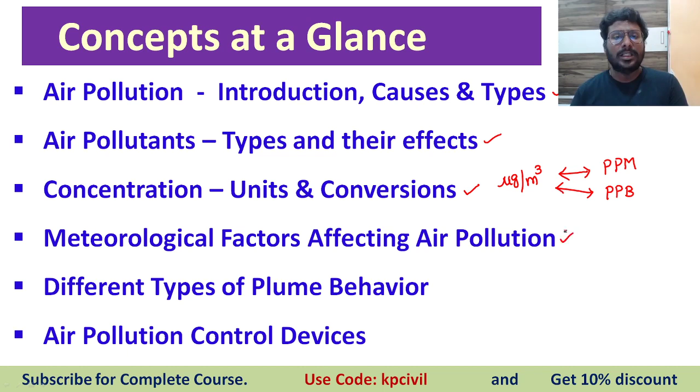We have discussed already, and we have gone through just an introduction of meteorological factors yesterday. Today we are going in depth related to meteorological factors - what are meteorological factors, what are their effects, and all those things. Just in brief, within 5 minutes I am going to tell what we discussed yesterday.

Yesterday we discussed regarding effect of temperature on air pollution, studied with respect to lapse rate. Lapse rate is change in temperature with respect to altitude, dt by dz. What we can write down: T2 minus T1 by Z2 minus Z1. Temperature at an altitude Z2 is T2. Temperature near to ground level at an altitude Z1 is T1. Difference in temperature to difference in altitude - that is said to be lapse rate.

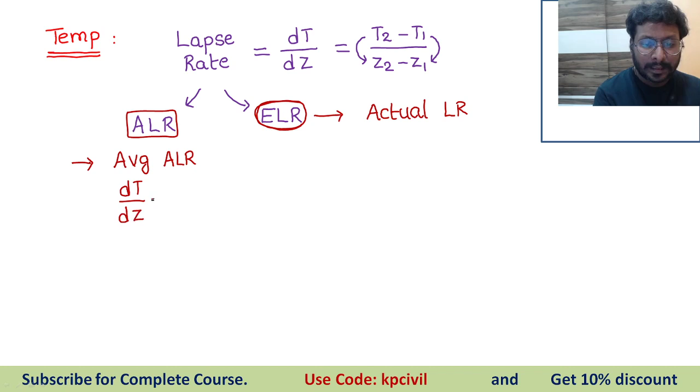This lapse rate we have differentiated into 2 types: adiabatic lapse rate and environmental lapse rate. Theoretical, standard or reference lapse rate - that we conclude as adiabatic lapse rate. Practically varying, actually what is going to happen in the atmosphere, time to time, place to place, region to region, as per atmospheric condition - that is environmental lapse rate. This adiabatic lapse rate, we have given average adiabatic lapse rate in the entire atmosphere, where dt by dz equals a decline of 6.5 degrees Celsius per 1 kilometer - that is average adiabatic lapse rate.

Wet adiabatic lapse rate, where dt by dz is equal to a decline of temperature of 4 degrees Celsius per kilometer. The most comparable and most important for our exam point of view, dry adiabatic lapse rate, where dt by dz is equal to a decline of minus 10 degrees Celsius per kilometer. Actually that is 9.8, we have rounded it off to 10 - minus 10 degrees Celsius, minus 9.8 degrees Celsius per kilometer. That is said to be dry adiabatic lapse rate.

Now today, the continuation of the topic we are discussing - types of ELR. ELR is environmental lapse rate.

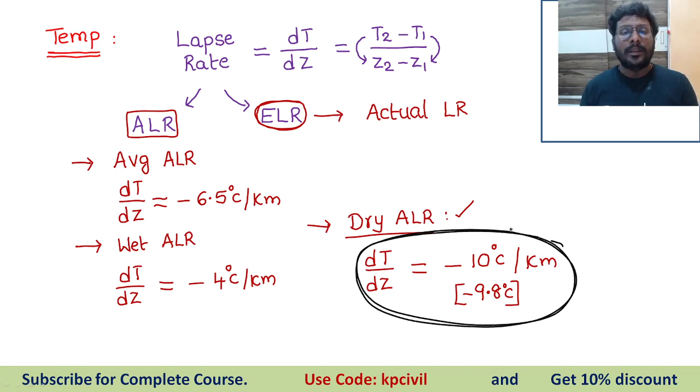We are discussing types of environmental lapse rate. Why have we given it the name super adiabatic? Because in comparison with the standard dry adiabatic lapse rate, we are expressing environmental lapse rate. So it is called a super adiabatic lapse rate, where we can say environmental lapse rate is greater than dry adiabatic lapse rate.

That means practically occurred change in the atmosphere. What is practically occurred change in the atmosphere? dt by dz. We have measured temperature at ground level and temperature at 1 kilometer, and the obtained value of dt by dz is greater than dry adiabatic. What is the value of dry adiabatic? A decline greater than 10 degrees Celsius per 1 kilometer.

Very important thing I am going to reveal here. Normally if you say mathematically greater than minus 10, what will you say? Greater than minus 10 is minus 9, minus 8, minus 7. No, here don't apply that mathematical condition. Here minus is the word representing decline, we are writing minus to represent decline. So dt by dz greater than minus 10 means decline of more than 10 degrees Celsius takes place. So temperature decline is either 11, 12, 13, 14, whatever higher than 10 degrees Celsius. So don't take this minus as a mathematical thing, consider that minus as a decline.

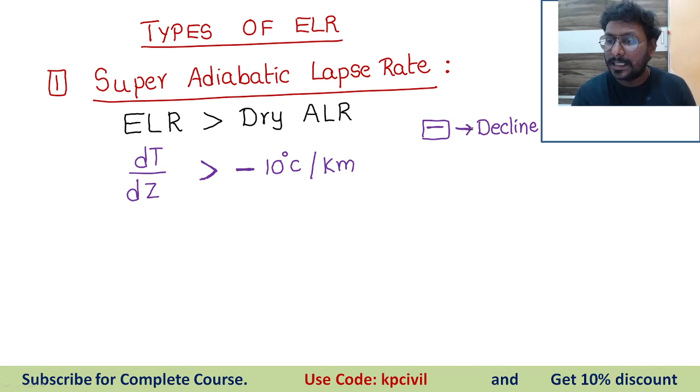I will simplify and easily explain this. Consider this is the 0 kilometer line where we are living, ground level. And this is 1 kilometer altitude Z. Now at ground level, consider the temperature as 40 degrees Celsius. So according to dry ALR, what is the temperature after 1 kilometer? Minus 10 degrees happened, means temperature falls down to 30 degrees Celsius according to dry adiabatic lapse rate.

Now our super ALR is going to happen. Same 40 degrees Celsius temperature falls down to, take for example, 25 degrees Celsius. And what is the decline of temperature? 15 degrees Celsius decline, means temperature is falling down more than 10 degrees. It may be 25, it may be 26, it may be 24, it may be 20 also, but it is not 30 or more than 30, it is always less than 30 only. So temperature decline, any value, for example I have given 15 degrees, it may be a decline of 11, 12, 13, 14, or even 20.

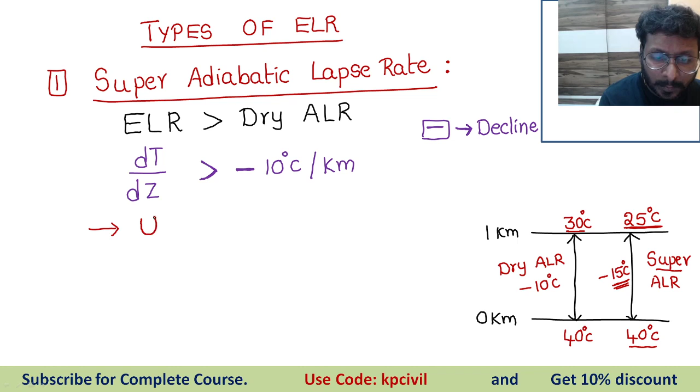Here three conditions we are going to discuss. Normal condition, temperature exactly equal to a decline of 10 degrees. More than expected condition, and less than expected condition. Temperature fluctuation very high, more than expected, that is unstable condition. Temperature change very less than expected, that is stable. Now what happened? Temperature expected 10 degrees decline, but what happened is more than 10 degrees. So fluctuations in the atmosphere are more than expected, that means atmosphere is unstable condition. This is unstable atmosphere condition. So what we have expected, more than that occurred, so atmosphere is not quite stable, it is an unstable condition.

So in unstable atmosphere, how are spread and mix going to happen? How do dispersion and dilution happen for an unstable atmosphere? Yesterday we discussed the relation between stability of atmosphere, dispersion and dilution, and relation between dispersion, dilution and air pollution also. So in unstable atmosphere, dispersion and dilution is very, very high. Spread, impurities are going to spread throughout the atmosphere, mix with more and more fresh air molecules. So dispersion and dilution is high.

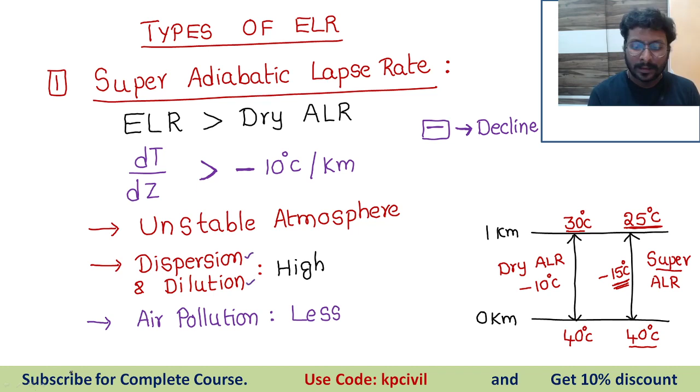Now if dispersion and dilution is high, what happens to air pollution? Air pollution is said to be less. Why is air pollution said to be less? Because spread of pollutants will make pollutant mass travel far away from the chimney, so there is no fall down of pollutant mass. It was taken far away because of more dispersion and more dilution. Due to that reason, air pollution is said to be less.

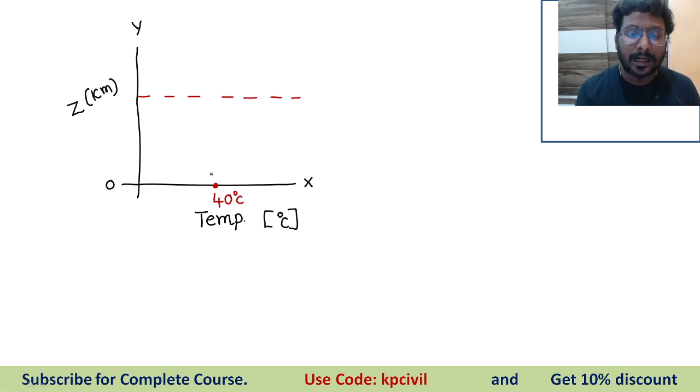If I consider, I am going to plot a graph. Altitude is taken on y-axis, z in kilometer. This is ground level, 0 kilometer. Temperature is taken on x-axis in degrees Celsius. And we have marked the 1 kilometer line, consider this is a line of 1 kilometer. Now the ground level surface temperature is 40 degrees Celsius. So first we have drawn the curve for ALR, dry ALR. The curve is like this, dry ALR we have identified, it is 30 degrees Celsius. Got the point?

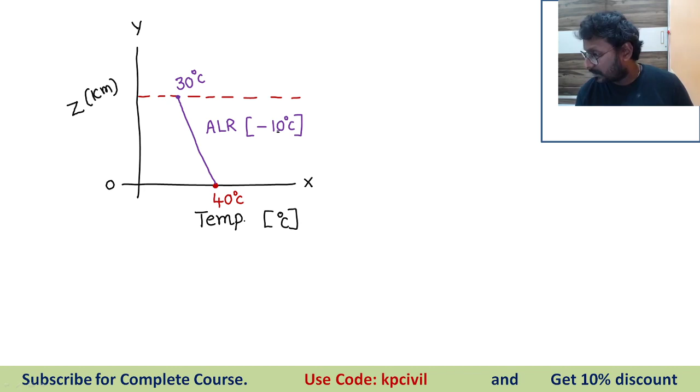Then, what happened if super adiabatic lapse rate occurred? This is the curve of adiabatic lapse rate. What happens if super adiabatic lapse rate occurs? How will the curve shift - to right or left? Tell me.

For adiabatic lapse rate, the graph is given to you. This is an important question, a theoretical question given in ESE and GATE. This is the curve related to adiabatic lapse rate. Super adiabatic lapse rate is going to happen. How will the curve shift? Show me the curve for super ALR. Left - very good, Manoj, you are very fast. The curve will shift towards left.

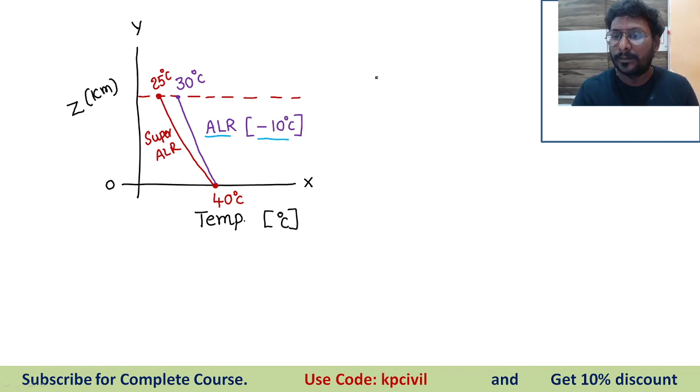25 degrees Celsius. For super ALR, because the decline is more, the curve falls down to the left condition. We'll consider along with the curve, you need to know what is the behavior of the plume.

Yesterday we drew 3 patterns of the plume. First pattern goes exactly in vertical upward direction. Second pattern may move horizontally. Third pattern gets falling down. Now the plume behavior for super adiabatic lapse rate, we call it looping plume behavior.

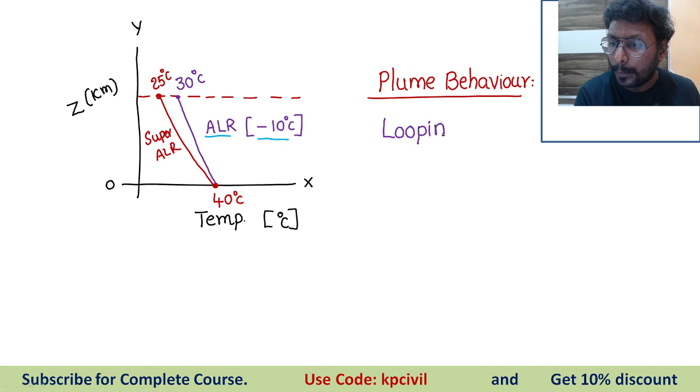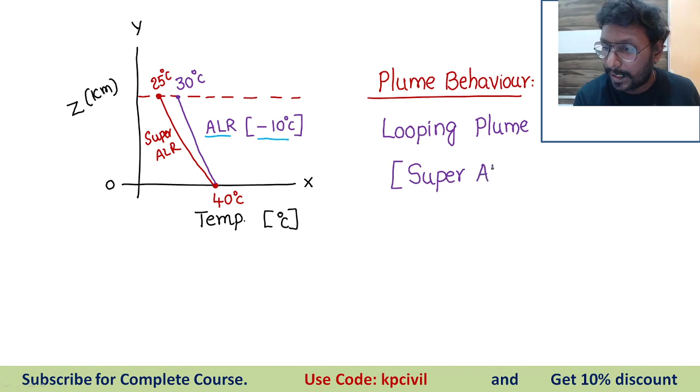The plume behavior for super ALR - this is an important question. Plume behavior for super adiabatic lapse rate is looping plume behavior. This is the looping plume. I am going to show it directly in the form of a picture. The pollutant mass moves like a loop, like a wave which passes far away, rising thermal.

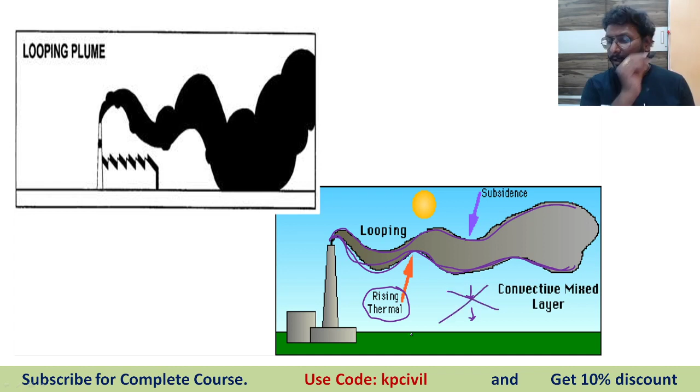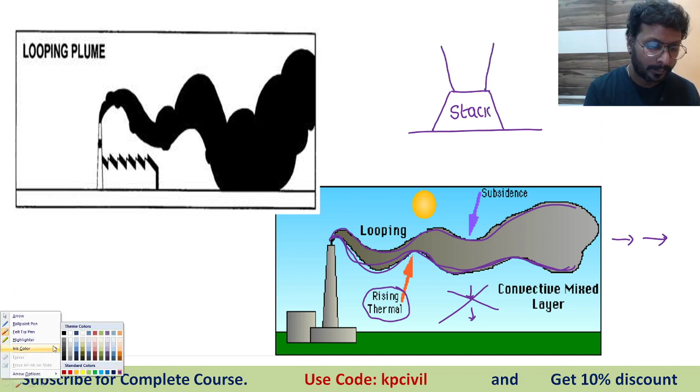The plume mass rises up, not falling down, moves in horizontal direction, spreads in the atmosphere. So the convective mixed layer is not at all falling down, it goes in horizontal direction. Yesterday we gave the diagram - this is the stack of the chimney. Pollutant mass is released. There are 3 possibilities: one is vertical upward, second is horizontal, and the third is falling down to ground level.

This horizontal behavior we consider here occurs because of super ALR. So it's a leftward shift - Sai Mukesh Gajala, it is not left-right, it is towards left because temperature decreases. So horizontal dispersion of pollutant mass is taken far away, not near the chimney, goes far away from the chimney. This is going to happen. This is related to looping plume behavior. Clear? We'll move ahead.

Then second type of environmental lapse rate - sub-adiabatic lapse rate. Second type of environmental lapse rate, sub-adiabatic lapse rate. A very important thing I would like to tell you - remember these diagrams, match-the-following questions are given to you: identify the plume pattern. So by seeing the diagram, you have to identify what kind of plume behavior is going to happen. You can identify the plume pattern. That is very important, remember it.

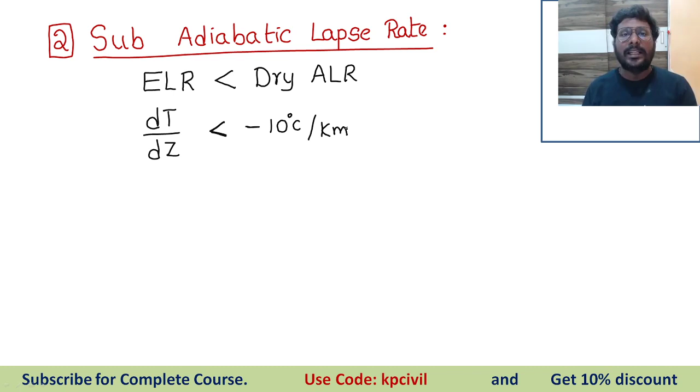Then second one, sub-adiabatic lapse rate. The environmental lapse rate is less than the dry adiabatic lapse rate. That condition we call sub-adiabatic lapse rate. What can we say? The practically occurred dT by dZ - you have measured temperature at ground level and temperature at 1 kilometer above ground level. The difference estimated, that difference estimated is less than 10 degrees Celsius decline per kilometer. So a decline less than 10 degrees Celsius happens per every kilometer. That is said to be sub-adiabatic lapse rate.

Again, I will show this to you in the form of a diagram, that is easy for you to understand. Now, ground level 0 kilometer, altitude 1 kilometer. As we know about ALR, 40 degrees Celsius falls down to 30 degrees Celsius for ALR - minus 10 degrees Celsius per kilometer.

Now, if sub ALR is going to happen, what is occurring? Tell me. Modification is done. Sub adiabatic lapse rate is going to happen. Then it may be temperature 40 to 35 degrees Celsius. Temperature is declined, but not 10 degrees Celsius. It may be 9, 7, 8, 6, 4, 5, 2, 3, 1, whatever it may be. But not equal to or greater than 10, it is less than 10. So we take this only as an example.

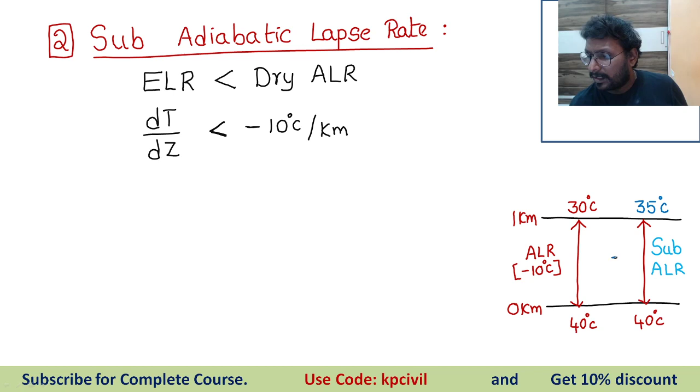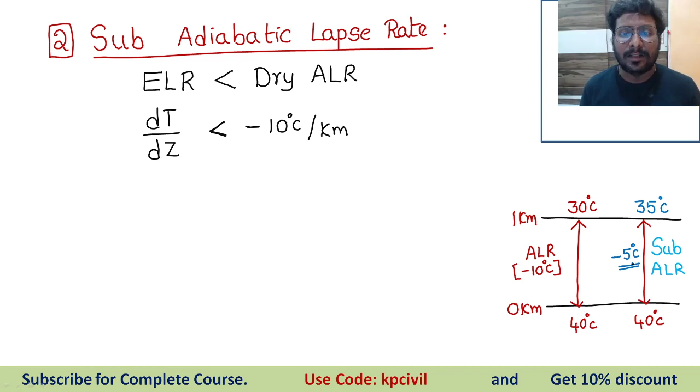Don't feel every time it's only minus 5 - it may be minus 5, minus 4, minus 3, minus 2, minus 1, minus 6, minus 7 - any decline value less than 10 degrees Celsius per kilometer. This is with respect to sub-adiabatic lapse rate. So whatever fluctuations happen, if the atmospheric condition is less than normal, less than expected - you have expected a decline of 10 degrees, but practically what occurred is less than expected. Got the point? Practically it happened less than 10 degrees. What happened - whether atmosphere is stable or unstable?

Yes, temperature will be greater than 30 for 40 degrees, because we have taken 40 degrees. Not always 40 degrees, no? So it may be any value greater than 30 if you take 40 degrees. Correct, Gopi Satish Malla.

Temperature rise we will discuss in inversion, the fourth condition. We'll continue, go ahead. Don't worry, we'll discuss temperature rise also. The first three conditions are related to temperature decline. After that, the conditions are related to temperature rise. Yes, stable. Very good, Narendra and Gopi Satish Malla.

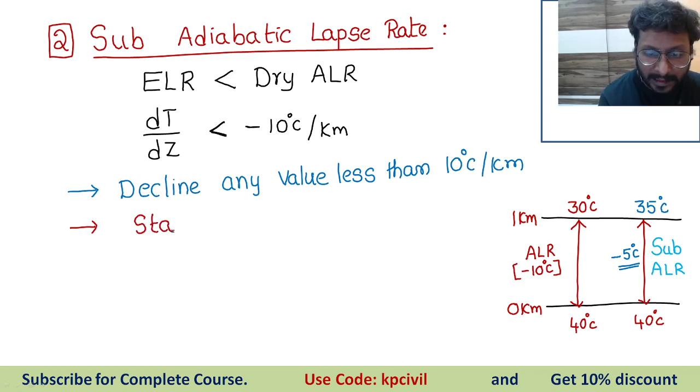Stable atmosphere: the change is less than expected, so the atmospheric condition is stable. If the atmospheric condition is stable, what happens to dispersion and dilution? Tell me. For a stable atmosphere, the atmosphere is changing less than expected, so it is stable. Fluctuations are very small, not considerable. What happens to dispersion and dilution? Good, Manos.

Dispersion and dilution is less. Good, Naveen and Neeraj also. Less dispersion and dilution, then air pollution. The pollutant mass is not spreading away, not mixing with fresh air. It is not moving away, it is located there itself. So what happens? Air pollution is high.

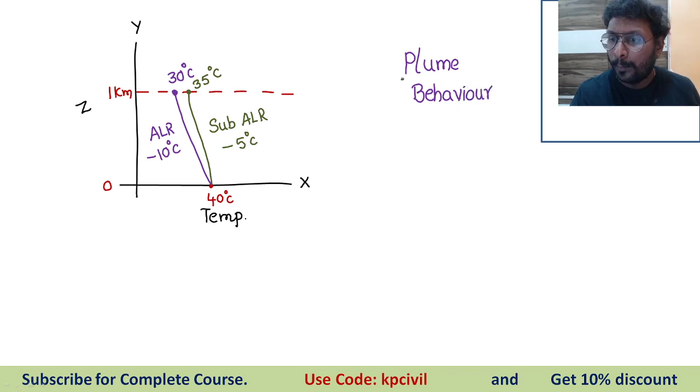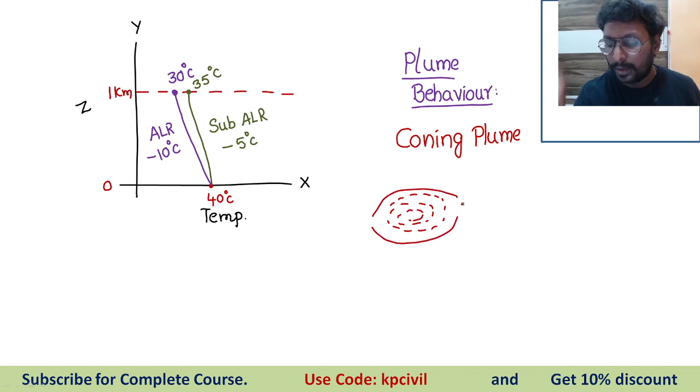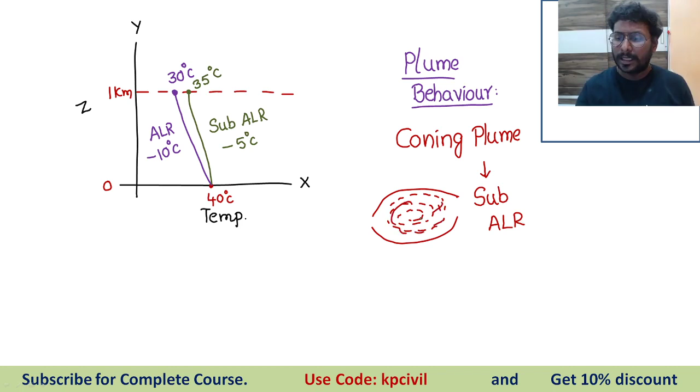Now, plume behavior. For sub-adiabatic lapse rate, the plume behavior we call coning plume behavior. What happens to the plume mass? The released plume mass accumulates and generates a cone-shaped mass. This we call coning plume behavior for sub-ALR, because spread is less and mixing with fresh air is less, so the pollutant mass circulates, forming a cone-shaped structure near the ground level.

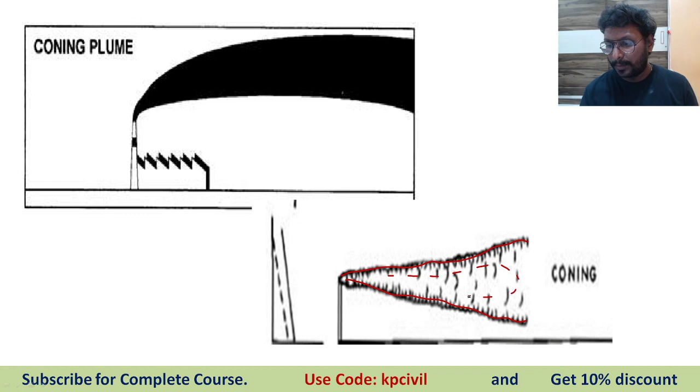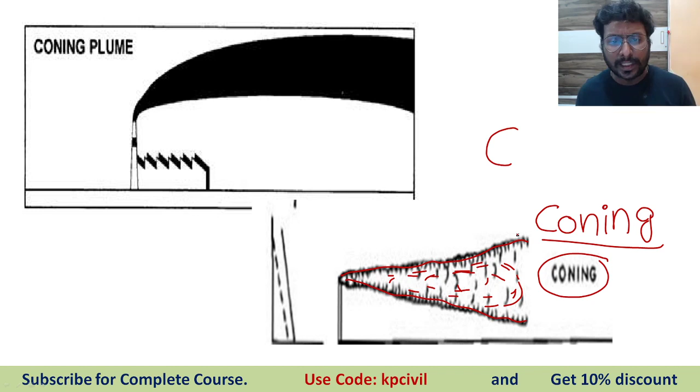See here, a cone-shaped structure is generated, accumulation is generated. Coning, I am writing here: a coning mass is going to be created, accumulated near the ground level. This is for sub-adiabatic lapse rate.

Then the next one, the third condition: neutral lapse rate. Environmental lapse rate is equal to dry adiabatic lapse rate. What we expected to happen in nature, the same thing happened in nature. We expected dT/dz exactly equal to a decline of 10 degrees Celsius, and the same thing happened without any modification. So we can write dT/dz exactly equal to minus 10 degrees Celsius per kilometer.

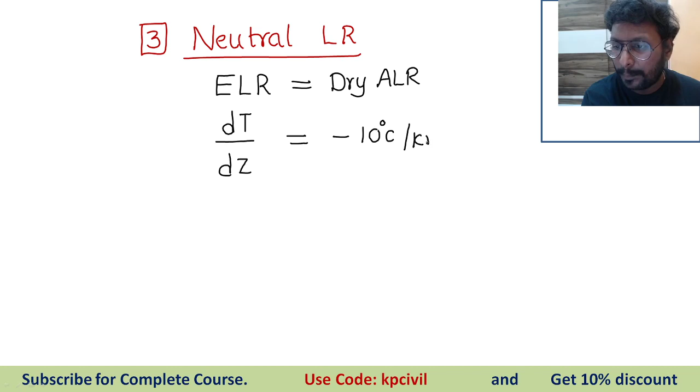Change in temperature. So stable, high pollution, sub-adiabatic. Correct, Taqdeer. Ideal condition.

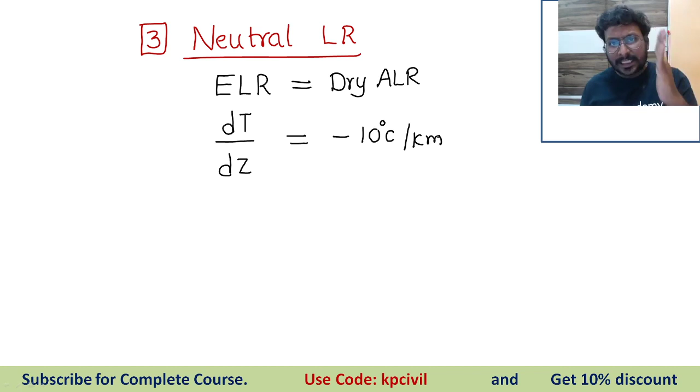So for neutral lapse rate, you designed the stack height of the chimney considering dT/dz exactly equal to minus 10 degrees Celsius, so that the pollutant mass does not go horizontally, does not fall down, but goes high into the atmosphere and does not return. You designed the stack height for that condition, and you got dT/dz of minus 10 degrees Celsius per kilometer practically. The practically occurring lapse rate equals the theoretical reference, the dry adiabatic lapse rate. Such a condition is called neutral lapse rate.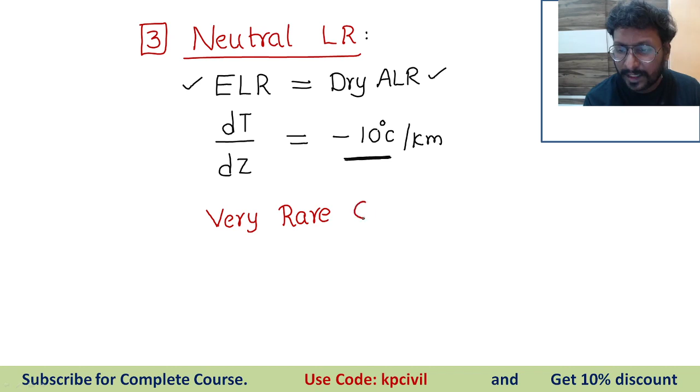This condition, we are going to say, having that condition in the atmosphere is a very rare condition. So no need to plot the graph. Same graph. Whatever we have given for dry adiabatic lapse rate, the same graph is going to happen. Whatever temperature shift happened, the same temperature shift happened. No need to draw any kind of graph related to it.

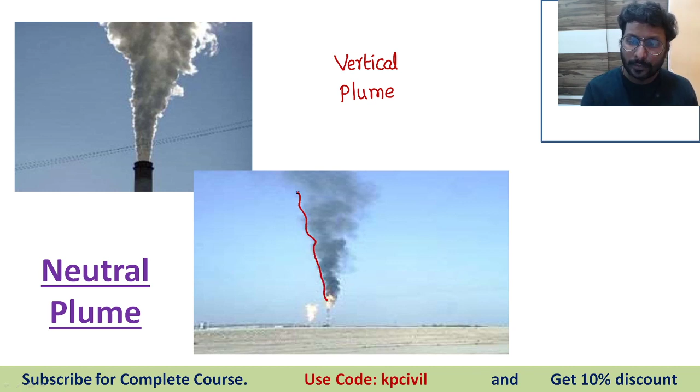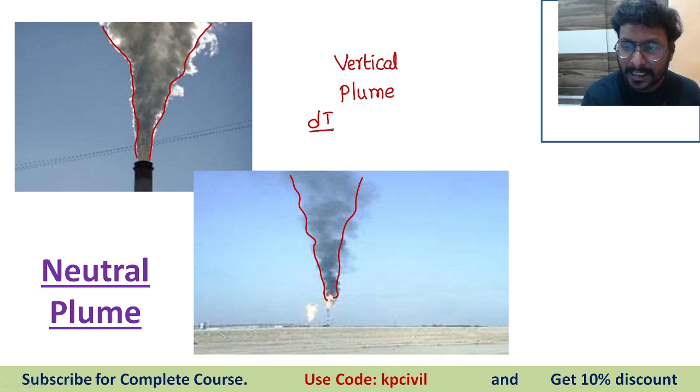This is a neutral plume. Vertical plume, the plume we call a neutral plume, or even we can say it as a vertical plume for neutral lapse rate. Plume mass is releasing, flowing in the vertically upward direction. See here, flowing vertically upward. Plume mass is going away in the vertical upward direction. Neutral plume: exactly dT/dz exactly equal to a decline of 10 degrees Celsius per kilometer. Plume mass is not moving horizontally, not falling down.

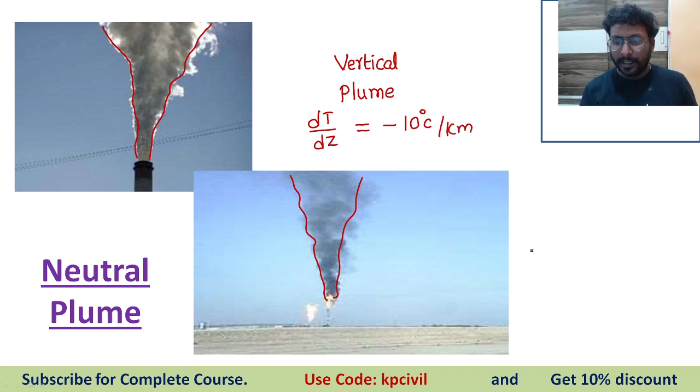So we have given three conditions to you. See, first condition, moving horizontally, we call moving horizontally super LR. Falling down near to ground level, that we have given sub LR. Going exactly high above the chimney, not horizontal, not falling down, that condition we call a neutral lapse rate.

In the beginning we explained, from the stack of the chimney, plume mass is releasing. It has three fates. First fate, horizontal fate, superadiabatic lapse rate. Falling down fate, subadiabatic lapse rate. Going vertically upward, neutral lapse rate. These are the three fate conditions. This condition is a very rare condition.

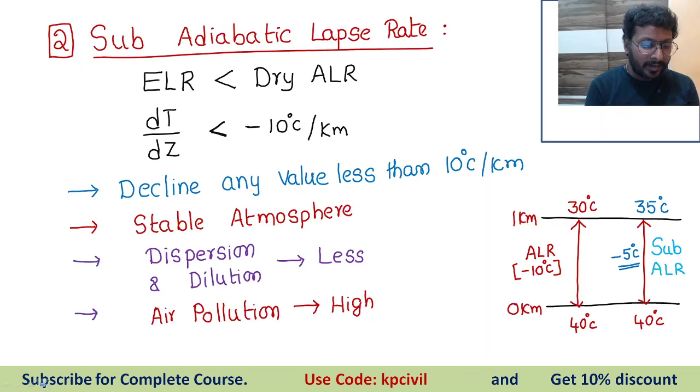First thing you need to remember, my dear students, we can't say when it is going to happen, how it is going to happen. Everything is atmospheric behavior. So what happened previously, our scientists have analyzed and given us to study like this. We can't control any kind of the behavior. That is going to happen under three circumstances in the atmosphere. Our scientists have differentiated and classified three conditions.

One is exactly equal to minus 10 degrees Celsius per kilometer, that is neutral. Greater than minus 10 degrees Celsius, superadiabatic. Less than minus 10 degrees Celsius, that is subadiabatic. These three different conditions happen in the atmosphere, atmospheric behavior. No human, no scientist, no environmental engineer can control it. We can't say when it is going to happen, when it is not going to happen.

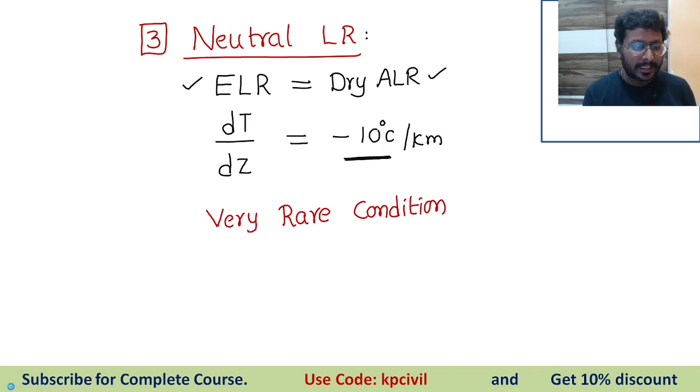Can you guess when rainfall occurs, when rainfall does not occur? Can you guess when summer high temperatures are there, low temperatures are there? Like this atmospheric behavior, we can't guess anything. Depending upon atmospheric behavior, our plume mass is going away. If exactly equal to 10 degrees Celsius, clear? If exactly equal to 10 degrees Celsius, our plume mass will travel in the vertically upward direction.

If greater than minus 10 degrees Celsius, our plume mass will travel horizontally. That traveling horizontally we named super ALR. If what practically occurred is less than 10 degrees Celsius decline, then subadiabatic lapse rate. We are not controlling. Whatever is going on, we have given some words to understand how the plume behavior is going to happen, how the plume will travel. For that, we have given some terms.

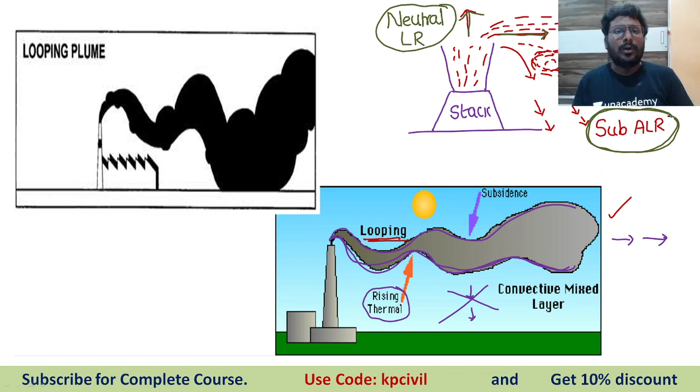That is depending upon passage of wind masses, velocity of wind, temperature fluctuation, pressure fluctuation, humidity and moisture content in the atmosphere. Based on all these factors, we conclude whether it is stable or unstable. Got it, Aditya Kumar?

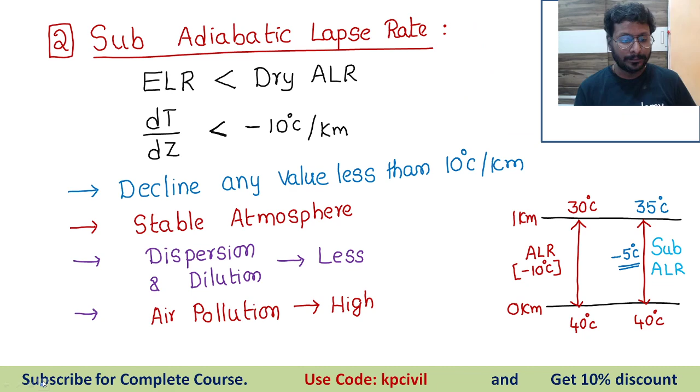Then, we have studied 3 cases now. What 3 cases have we studied? Super adiabatic lapse rate, sub-adiabatic lapse rate, and what is the third one? Neutral lapse rate.

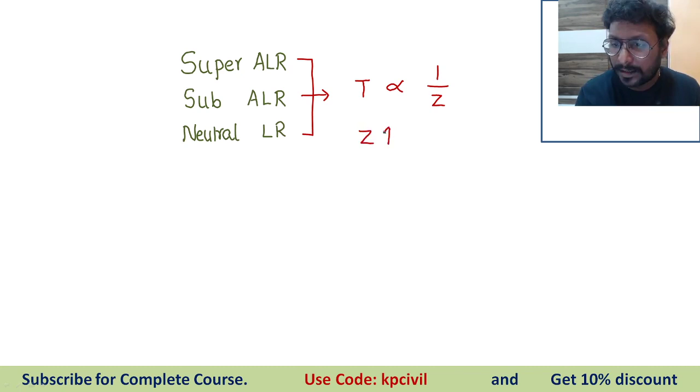Now, in all these 3 conditions, what is the relation between temperature and altitude? Temperature and altitude are inversely proportional for these 3 conditions. For super adiabatic lapse rate, subadiabatic lapse rate and neutral lapse rate, temperature is inversely proportional to altitude. That means with increase of altitude, what happens to temperature?

It decreases. Whatever the value of decrease, it may be a decline of 10 degrees, a decline of less than 10, or a decline of more than 10. But ultimately what is going to happen? With increase of altitude, vertical rise, if you go high above the ground level, temperature always goes on decreasing for these three conditions.

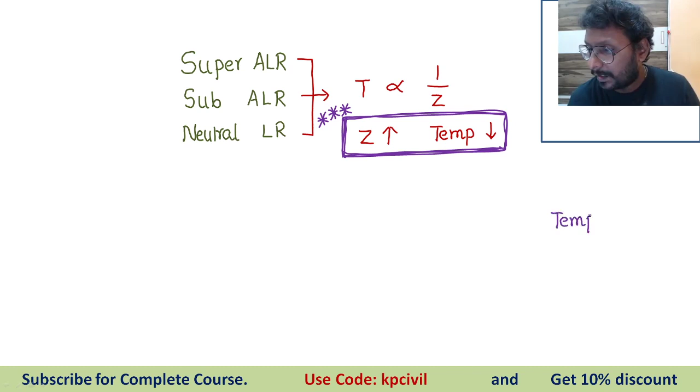How can we say that in subadiabatic lapse rate stability is more and the atmosphere is stable? Because temperature decrease is less. When temperature decrease is more, atmosphere fluctuations are more. So we'll write it down, that is easy for you. Temperature decreasing more means wind velocity is high.

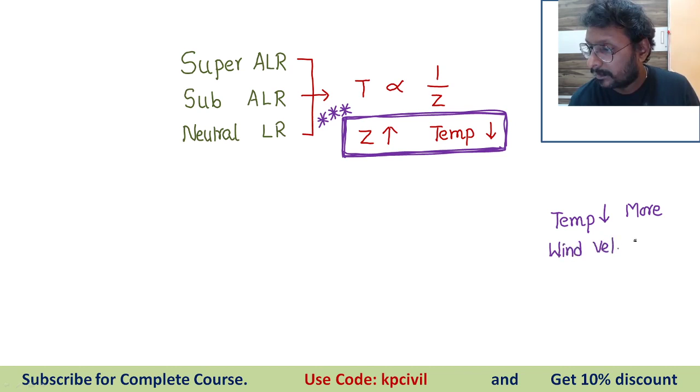When wind masses are moving faster, what happens to pressure? Pressure reduces. That means fluctuations are going to happen in the atmosphere. Fluctuations are high in such a case. If suddenly some wind mass is coming, will the atmosphere be stable? No. That wind mass will disturb the atmosphere, and we say the stable atmosphere is converted to an unstable condition. Clear? Temperature decrease is more, wind velocity is high, pressure reduces more, fluctuations are more, unstable.

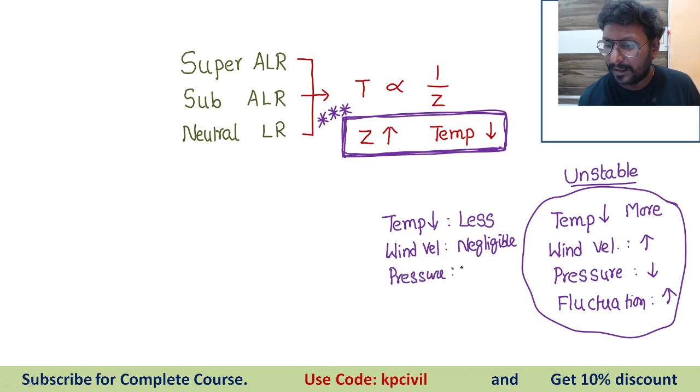If temperature fall is less, that means the velocity of wind or wind masses is negligible. Wind is not moving away that much, so pressure will be high. Pressure is high, fluctuations are less, clouds are not moving away, wind masses are not traveling. We call it stable. I think now you got the clarity, Aditya Kumar.

So, super adiabatic lapse rate, subadiabatic lapse rate, neutral lapse rate: temperature is inversely proportional to altitude. With increase of altitude, temperature decreases. If that decline in temperature is very high, the atmosphere is unstable. If the decline in temperature is less, the atmosphere is said to be stable. Clear? Decline is more, atmosphere is unstable. Decline is less, atmosphere is stable. So in this condition, temperature is inversely proportional to altitude.

Now we have a special condition, inversion. What happens in inversion? Temperature is directly proportional to altitude. That means with increase of altitude, when you go high above ground level, temperature also increases. In the first three cases, subadiabatic, superadiabatic, neutral, it is the reverse: altitude and temperature are inversely proportional. Irrespective of value, in all three cases, when you go high above, temperature falls.

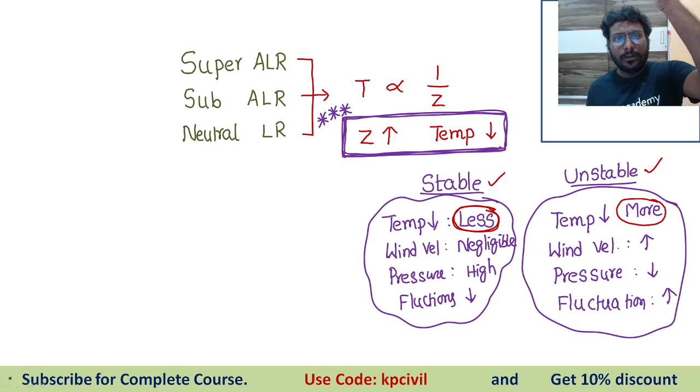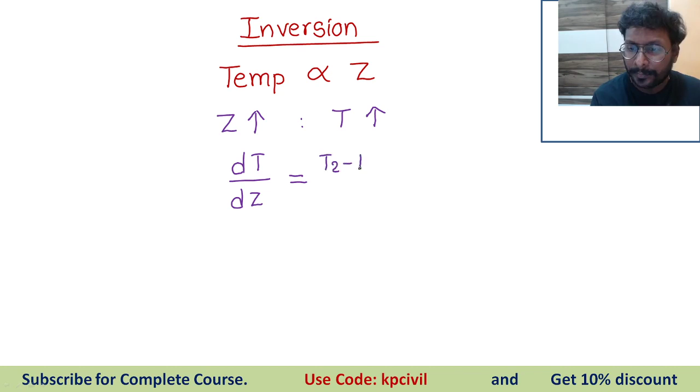But now, exactly opposite, both are directly proportional to one another. When you go high above, altitude increases, temperature also increases. The value of change in temperature to change in altitude, that means if you calculate T2 minus T1 by Z2 minus Z1, you will get a positive value. So we call this a positive lapse rate.

Till now what did we have? Negative lapse rate, because we were having minus values. Now we have plus values, positive lapse rate, dT by dz. Till now what was expected is a negative lapse rate. Now we are expecting a positive lapse rate. Temperature goes on increasing with the altitude. I will explain.

So again, this is the 0 kilometer line, this is the 1 kilometer line. We have taken 40 degrees Celsius at ground level. Reference is always the dry adiabatic lapse rate. So as per ALR, a 10 degrees Celsius decline, so 30 degrees occurs after 1 kilometer. Now for inversion, 40 degrees Celsius at the ground level, inversion is going to occur.

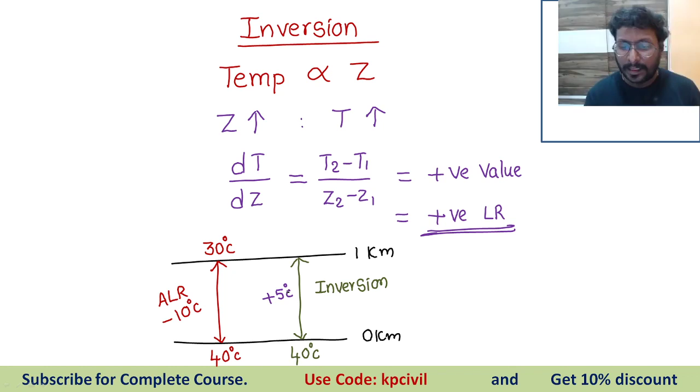There is a rise. The rise may be +1, +2, +3, +4, whatever it may be. Increase of temperature: 40 degrees may rise to 45 degrees Celsius. Maybe 40 to 50, 40 to 48, 40 to 60, whatever. Temperature goes on increasing with respect to altitude. That condition we call inversion.

If you plot a curve, altitude on the y-axis, temperature on the x-axis. Now this is the 1 kilometer line, altitude in kilometers.

So as per ALR, maybe this is 40 to 30 as per ALR. Now, how will inversion occur? It is at 45 degrees Celsius. So this is the curve for inversion. There is an increase of 5 degrees Celsius. That is the curve for inversion.

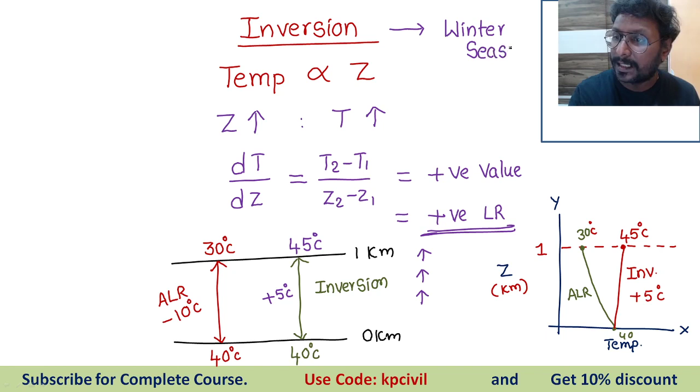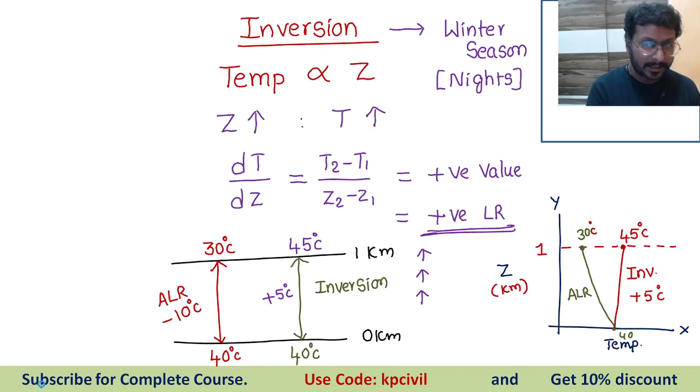Very, very important thing you need to remember here. This inversion is the lapse rate that happened during winter season, especially winter nights. Inversion is the lapse rate that happened during winter season, especially during winter nights. I will explain this to you clearly also.

This is the stack of the chimney. From this stack, pollutant mass is releasing into the atmosphere. And now, during winter season, what is going to happen is the temperature of the pollutant mass released, this plume temperature, plume mass temperature, T plume, is greater than the temperature of the atmosphere, because this is winter season.

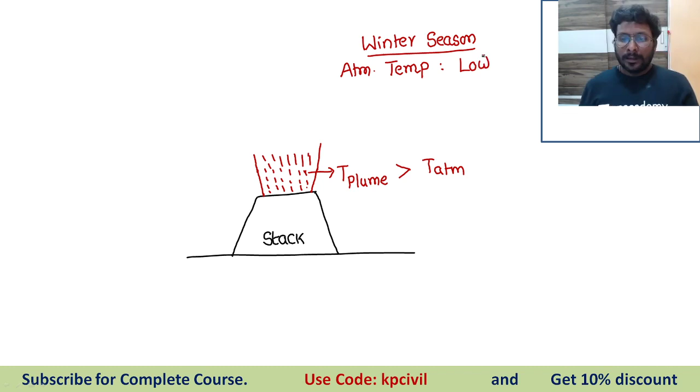What happens in winter season? Low temperatures are there in winter season. Low atmospheric temperature. We are discussing atmospheric temperature in winter season. It is said to be low. The plume mass, gaseous mass, pollutant mass, particulate matter, whatever is released from this stack, has high temperature when compared with the atmospheric temperature, the surrounding air in the atmosphere.

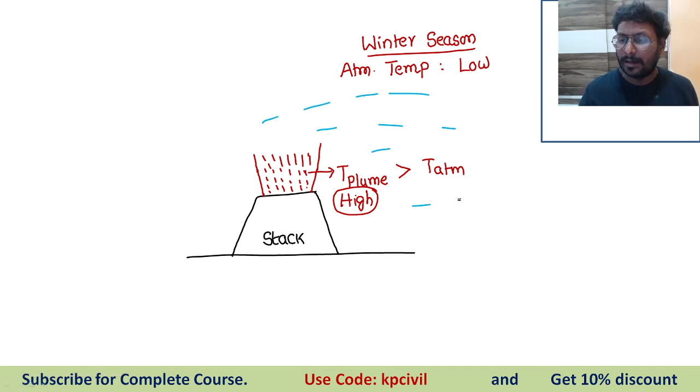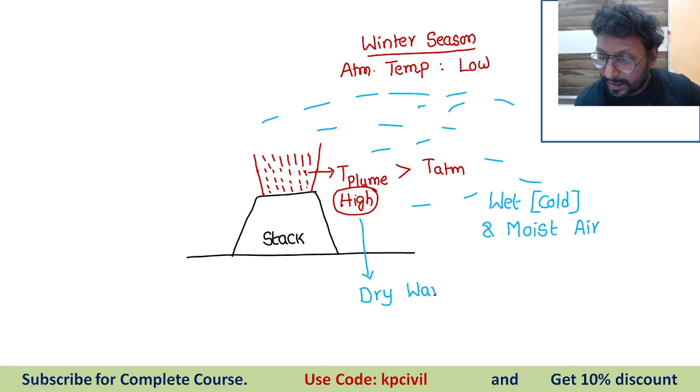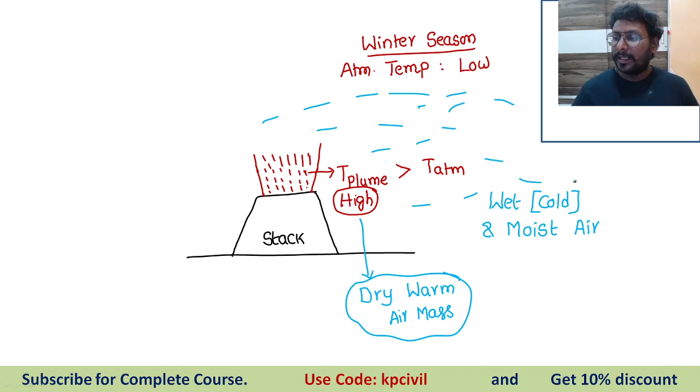So these are the surrounding air masses which are available in the atmosphere, and these air masses are wet, cold and moist air masses. The air masses during winter season in the atmosphere are wet, cold and moist. The plume which is released is a dry, warmer air mass. Two different conditions. The air mass released from the plume is dry and warmer. The air parcel available in the atmosphere is a wet, cold and moist air mass.

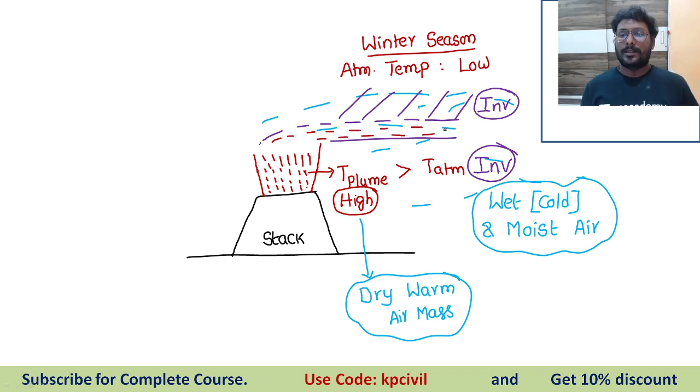So this air mass creates some inversion layers. Wet and cold moist air mass creates some layers. So this is inversion layer 1 above the chimney, and the second, inversion layer 2, below the chimney. So the plume mass is trying to travel in between the two layers. I will show you with a picture, that is easy for you.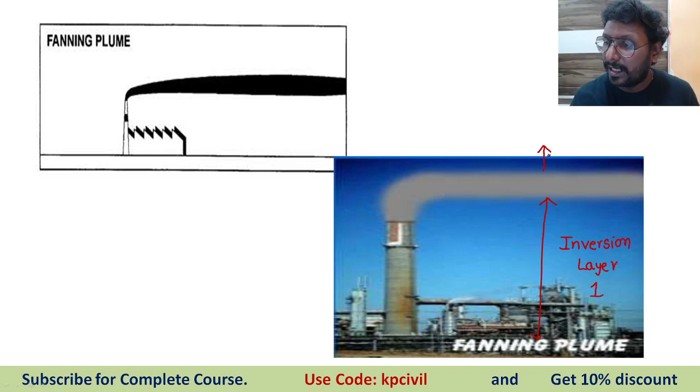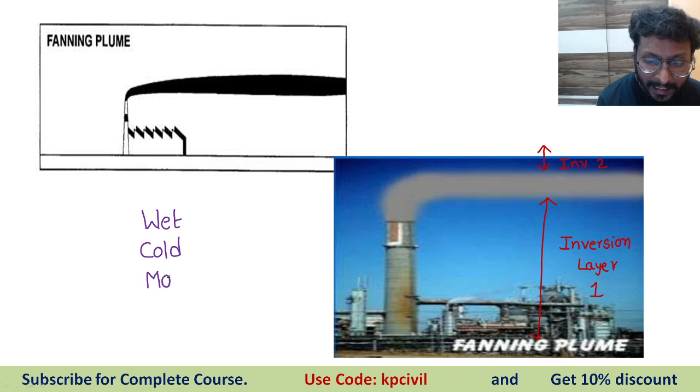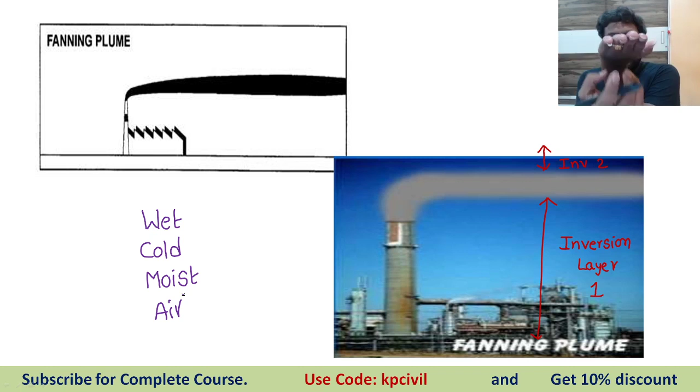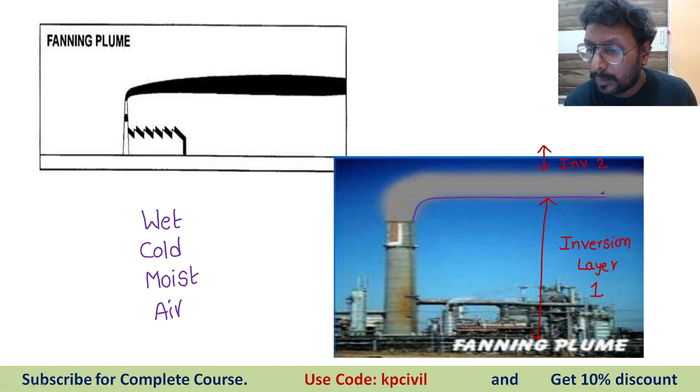So near ground level, moisture layer 1, because of wet atmospheric condition in the winter season, inversion layer 1, and also high above ground level, inversion layer 2. So what is an inversion layer? Inversion layer is a wet, cold, moist air parcel. This wet, cold, moist air mass does not allow pollutant mass to go down, and also does not allow pollutant mass to go high. So pollutant mass is moving in between these two.

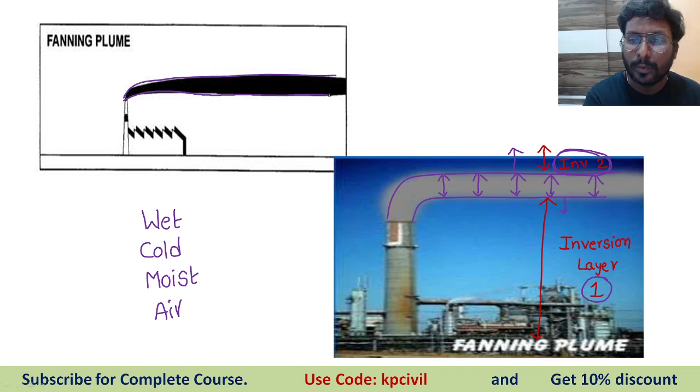What's the point? Pollutant mass is not allowed to move downward by inversion layer 1. Pollutant mass is not allowed to go upward by inversion layer 2, moisture layer 2. Simply remember: wet moist layer 1, wet moist layer 2. These two layers suppress the pollutant mass to travel only in this narrow passageway, far away from the chimney. Clear? It is moving now, far away from the chimney.

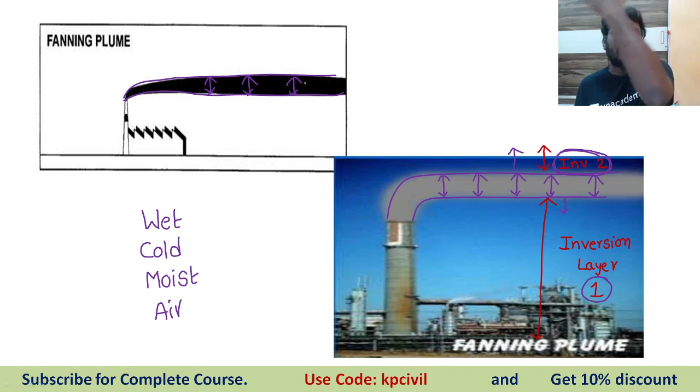Through the narrow passageway, how much distance can it travel? Tell me. Till the moisture layers disappear. For example, today in winter season, tonight at 11:30, the plume mass started its journey. Tomorrow morning at 8:30, 9 or 10 o'clock sunlight appears, and suddenly moisture disappears. At that location where moisture suddenly disappears, it is going to disperse in the air and fall down near ground level.

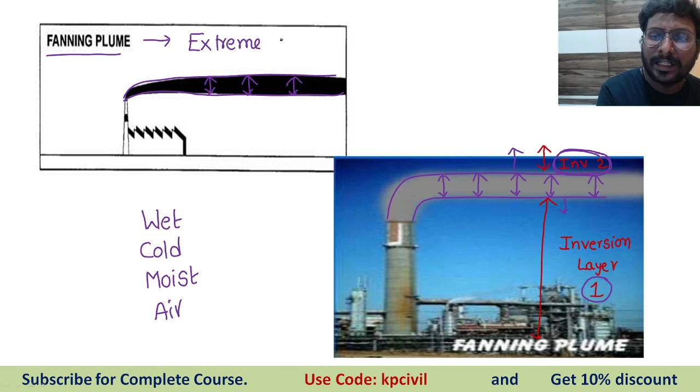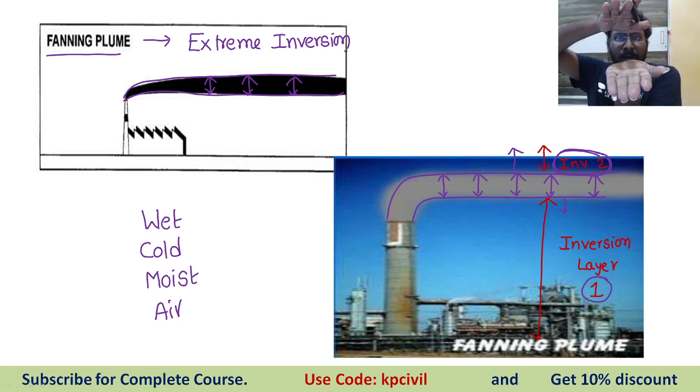Such plume behavior we call fanning plume, extreme inversion condition. Extreme inversion, where the top moisture layer is suppressed downward and the bottom moisture layer suppressed upward, and a very narrow passage of plume mass takes place, traveling far away from the chimney till the moisture layer disappears. Next day when sunlight appears and removes the moisture layer, the location of the pollution effect is not near the city. It may be far away. So that is said to be fanning plume, extreme inversion condition.

Yes, this plume acts as a borderline itself. Correct. That plume acts as a borderline itself. Got it? For everyone, you got it? Inversion behavior, fanning plume behavior.

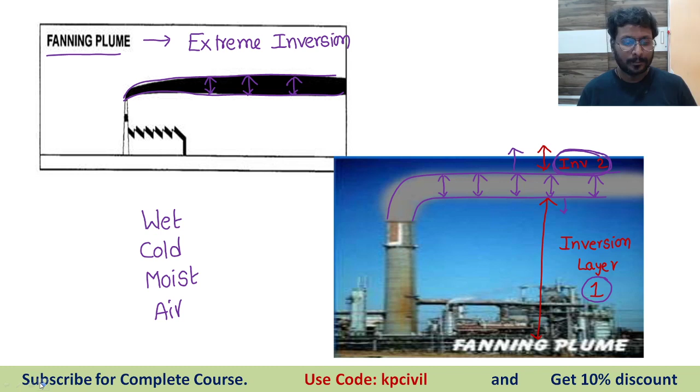So I am going to draw a curve which is going to give you the clear picture of all types of lapse rates. Altitude on y-axis, temperature on x-axis. Temperature is taken in degrees Celsius. Altitude is taken in kilometers. Then this is the 1 kilometer line.

Now first we are going to draw for dry adiabatic lapse rate. 40 degrees Celsius temperature. So dry adiabatic lapse rate occurred from 40 degrees Celsius to 30 degrees Celsius. So this is dry adiabatic lapse rate. How much change happened? Minus 10 degrees Celsius per kilometer. So 40 degrees Celsius of temperature falls down to 30 degrees Celsius according to dry adiabatic lapse rate.

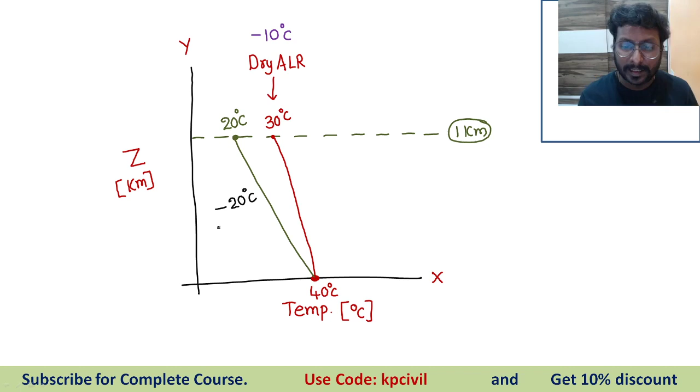Now I am going to plot for ALR. ALR is going to happen here, 20 degrees Celsius towards left. Minus 20 degrees Celsius has happened. dT by dz minus 20 degrees Celsius happened. What we call it as super adiabatic lapse rate. Super adiabatic lapse rate towards left.

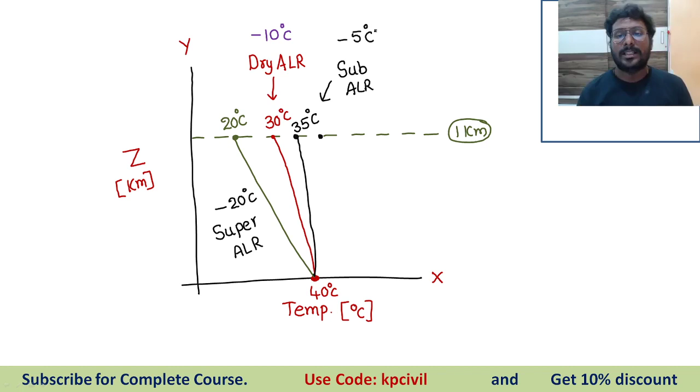Then I am going to plot for sub ALR. This is the condition. 35 degrees Celsius. How much decline? Minus 5 degrees Celsius, less than dry adiabatic lapse rate.

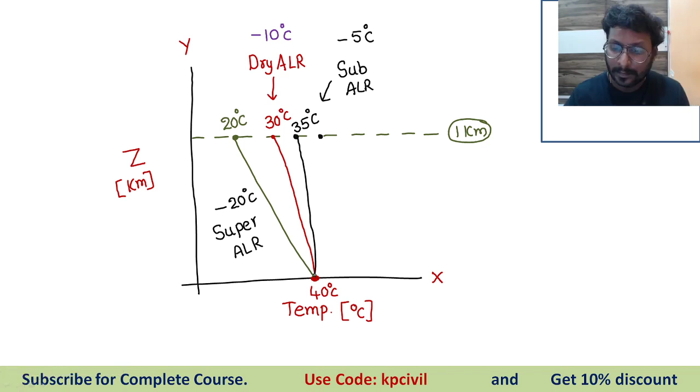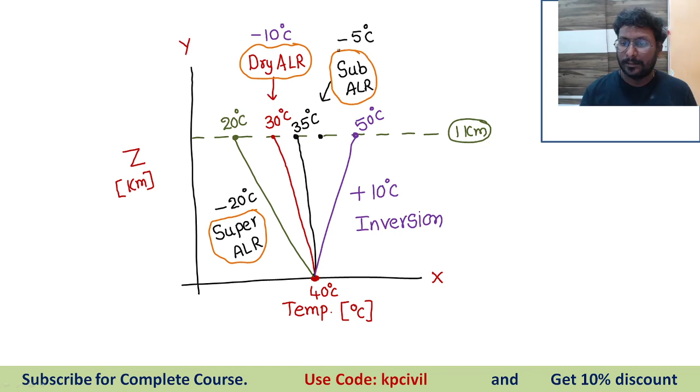Now plotting for inversion. At 40 degrees Celsius, temperature increases by 10 degrees Celsius, 40 to 50. This condition is called inversion. So all the four we have represented in this curve: super adiabatic lapse rate, dry adiabatic lapse rate, subadiabatic lapse rate, inversion.

So in some match the following questions, they may give the curve and mark it like A, B, C, D. Identify the lapse rate conditions according to A, B, C, D in the graph. So you have to choose options. This is a previous question. They provide the complete graph like how I have drawn and ask you for a 2 marks question in GATE or IES. Identify the lapse rate conditions as shown from the graph. Very important. All the 4 conditions we have shown here. Got it?

Hello Ashish, you came late, I think so.

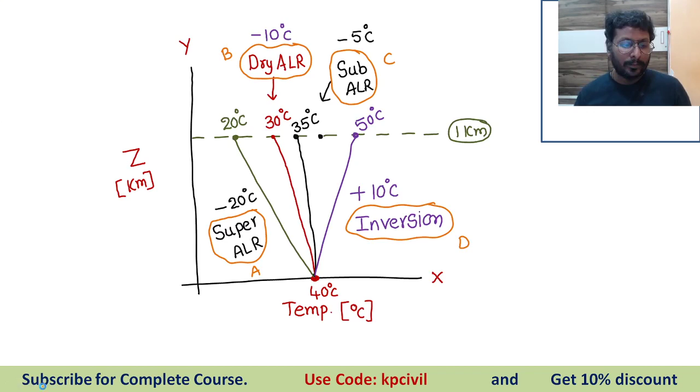So this is not yet completed. The next phase of meteorological factors is still there. Some other plume behaviors are there, we will discuss tomorrow. This is lofting, fumigating, trapping. These are the total plume behaviors. We will solve some numerical questions also. Phase 1 of meteorological factors is completed. You came to know 4 conditions: superadiabatic lapse rate, subadiabatic lapse rate, neutral lapse rate, and finally inversion. And again there are some differentiations in the inversion. Tomorrow we will discuss the different conditions of inversion, other factors affecting air pollution, and also numerical questions.